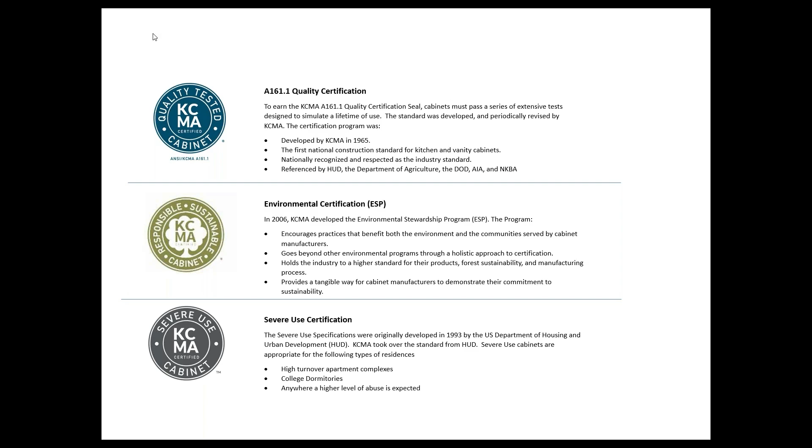One thing that I would like to mention before we get started with the presentation is the 3 standards do get updated and revised periodically by KCMA. The A161.1 standard, the latest version was published in 2022. During the revision from the 2017 to the 2022 standard, we did some clarification on some of the test methods, and we also added a test method in there for testing of wall-hung vanity cabinets.

The ESP standard, we're looking at publishing the latest version in 2024, and one of the additions that we're going to add to that will be the use of a carbon calculator. Participants in that program will be able to use this carbon calculator to determine their carbon footprint. And if they go through that process, they'll earn some points for certification.

Once we collect some data on the participant's carbon footprint, we'll consider doing a sliding scale for awarding points depending on what their carbon footprint is.

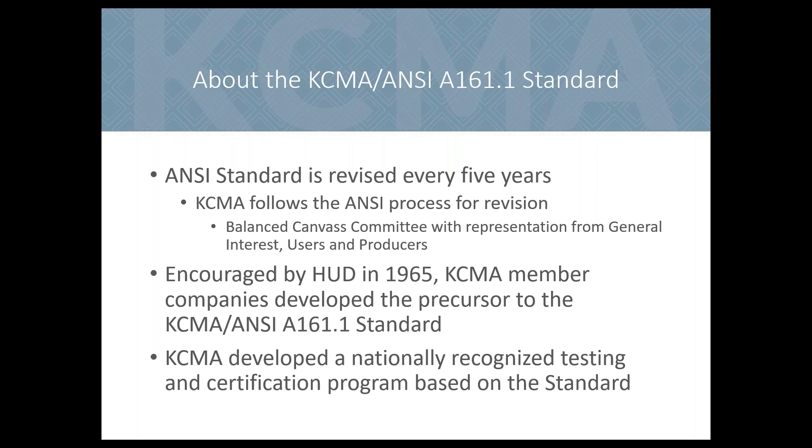HUD has minimum property standards for buildings constructed under HUD housing programs. This includes those single and multifamily homes financed with FHA loans. HUD has specified KCMA A161.1 certification for cabinets.

All North American cabinet manufacturers or cabinet assemblers are welcome to apply for participation in the KCMA A161.1 certification program. The North American presence is required so that cabinets can be randomly picked up for testing from either the manufacturing or assembly plant. KCMA is unable to certify ready-to-assemble or RTA cabinets because the performance of the cabinet during the testing is directly related to how the cabinet is assembled.

Manufacturers decide the cabinet lines to be included in the certification. They may certify one, several, or all of their cabinet lines. Most participants elect to have all of their lines included in the listing. Certified lines are listed on the KCMA website, www.kcma.org, and the listing certificates for each participant can be downloaded from the site.

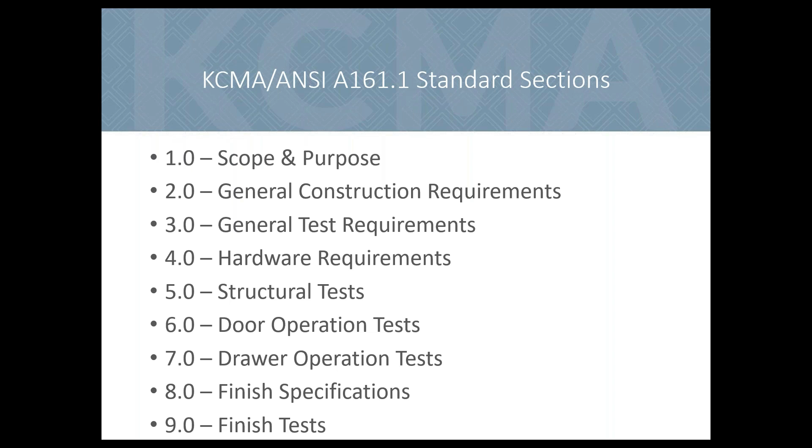Listed are the sections contained within the KCMA A161.1 standard. We will go over each of these in detail later in the course. As you can see, the standard covers everything from general construction requirements to testing of the cabinet finish.

There are very few construction requirements contained within a performance standard. The intent is not to limit materials or designs, provided the materials and design pass the performance test. This is different from other specifications that focus on grades of products based on the materials used in construction and the construction techniques. We will briefly go over the construction requirements that are contained within the A161.1 standard.

One requirement is that all wall cabinets need to be fully enclosed. All cabinets designed to rest on the floor must be provided with a toe space at least 2 inches deep and 3 inches high. When we get to the severe use cabinets, this requirement changes to 3 inches by 3 inches. All base cabinets must have backs, bottoms, and sides. We will see in the next few slides there are some exceptions for specialty cabinets.

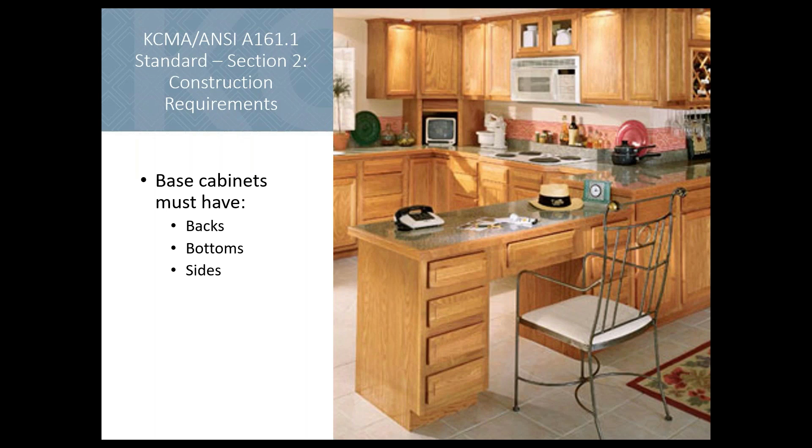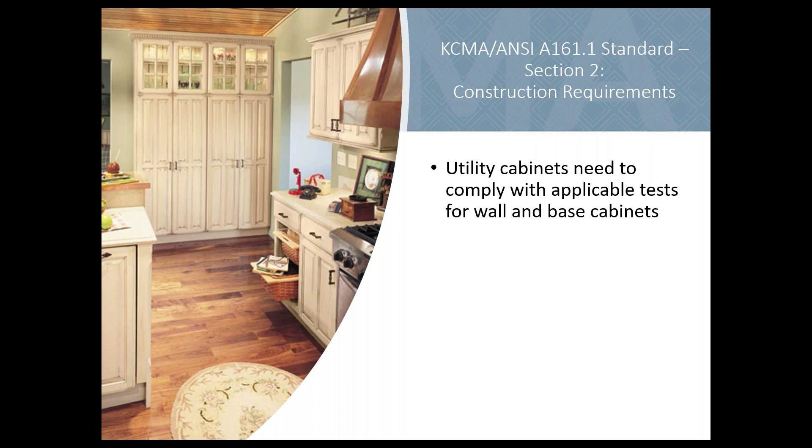All utility cabinets must meet the same requirements as base and wall cabinets. Exceptions are made for cabinets that need to have plumbing or wiring entering the cabinet. Utility cabinets without backs or with cutouts in the backs are permitted. Refrigerator, kitchen sink, and oven cabinets are allowed to have open backs or cutouts as well. This is for plumbing and wiring.

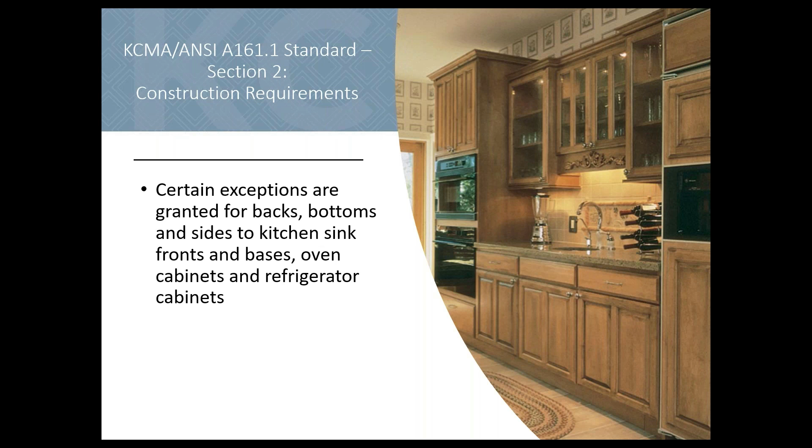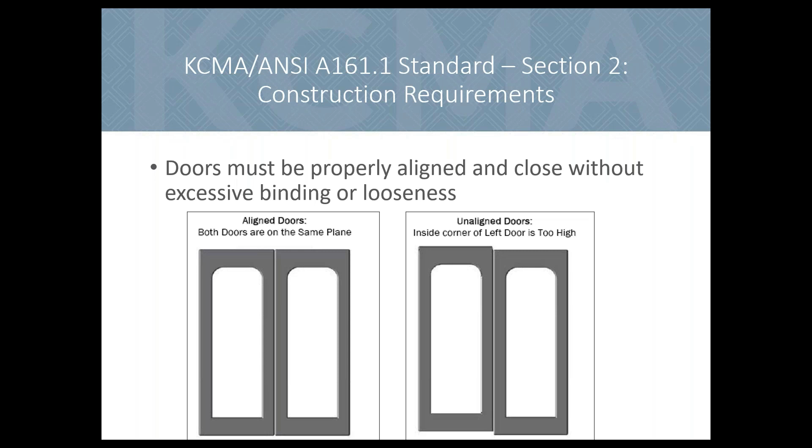Cabinet doors must be aligned and close without excessive binding or looseness. The laboratories performing testing in support of KCMA A161.1 certification are instructed to perform reasonable adjustment on the doors that are typical of an experienced installer. Whether the frames are individual or ganged, they must provide solid construction. The rigid construction requirement is determined through the compliance with the structural testing requirements contained within the standard.

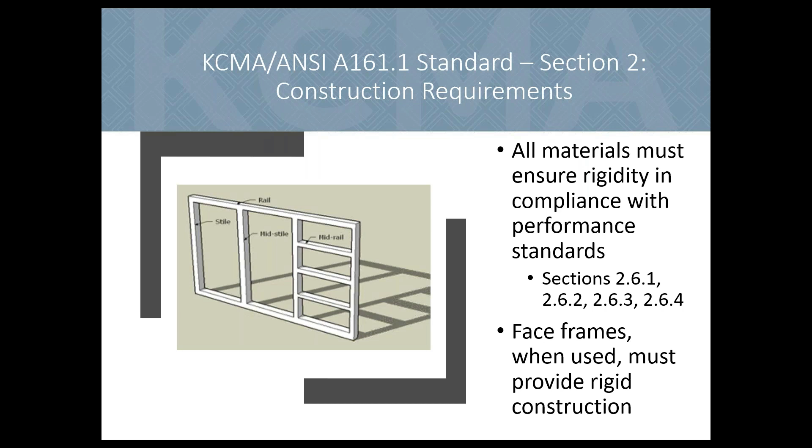A face frame is a solid wood frame placed over the opening, which provides a square and solid foundation for cabinet hardware such as slides and hinges. Thicknesses are usually 5/8 of an inch or 3/4 of an inch material in order to maintain quality construction. With frameless construction, the hardware is mounted to the inside of the casework. Developed in Europe following World War II, frameless has become the standard in commercial case goods and has become more popular in residential casework.

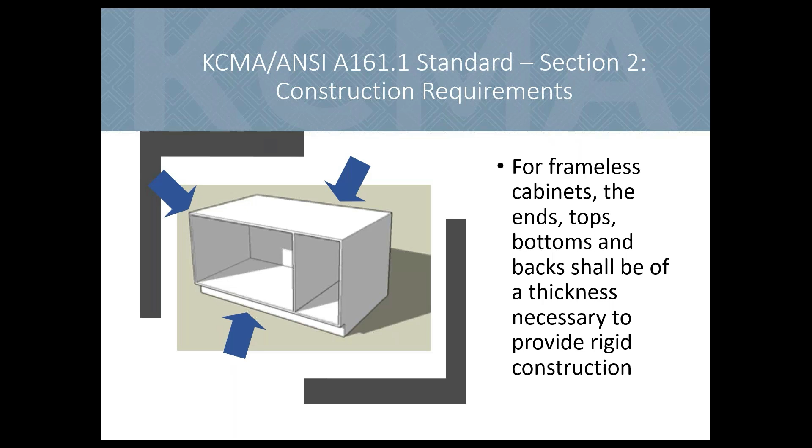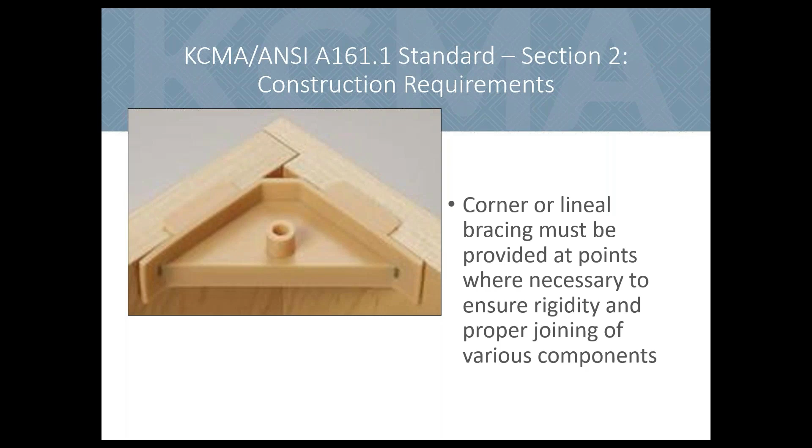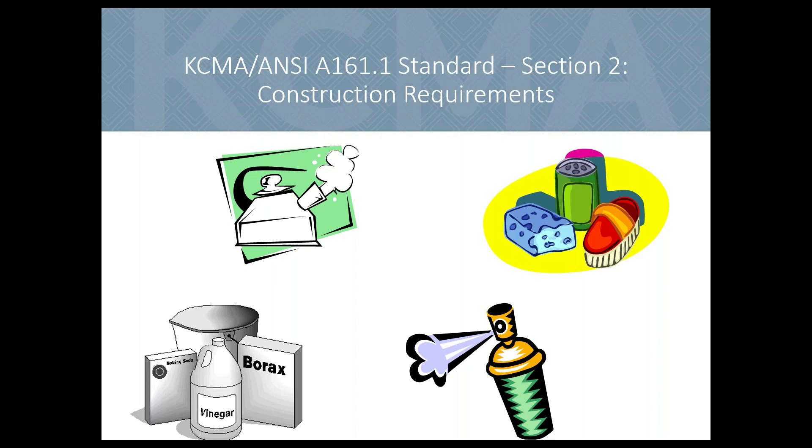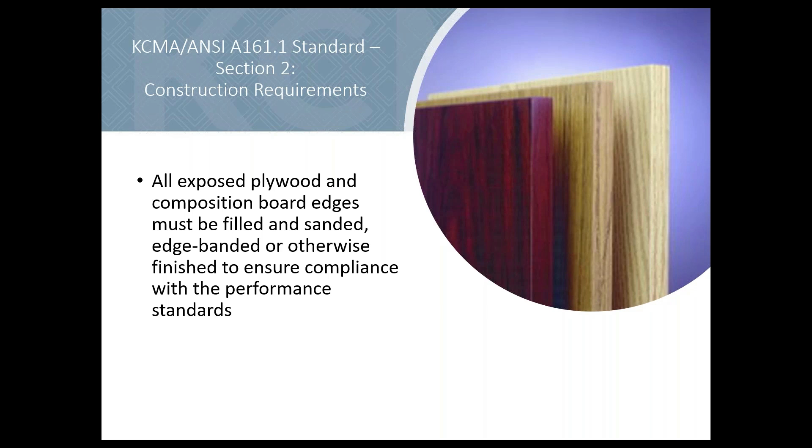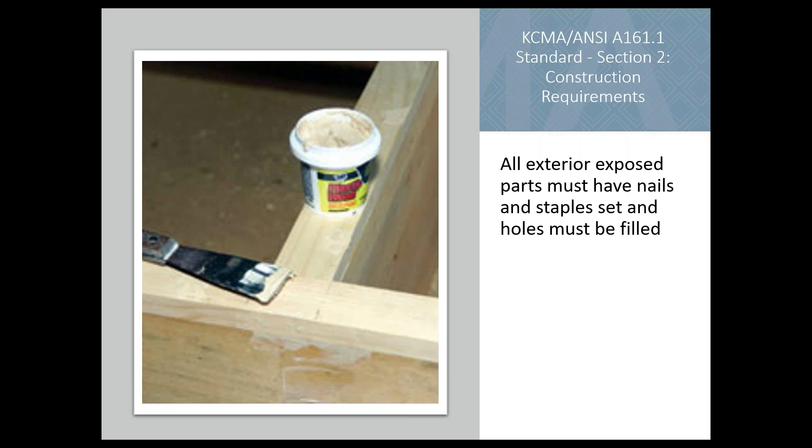All materials used in cabinets must be suitable for use in the kitchen and bath environment, where they may be exposed to grease, solvents, water, detergent, steam, and other substances usually found in these rooms. The performance tests determine if a material is suitable for use in the construction of the cabinet. The unfinished surfaces of the cabinets must be properly prepared before the application of the finish. This includes prepping of edges by either filling and sanding or using edge banding. In addition to finishing the edges, all nails and staples must be set and the holes filled and sanded to a smooth finish.

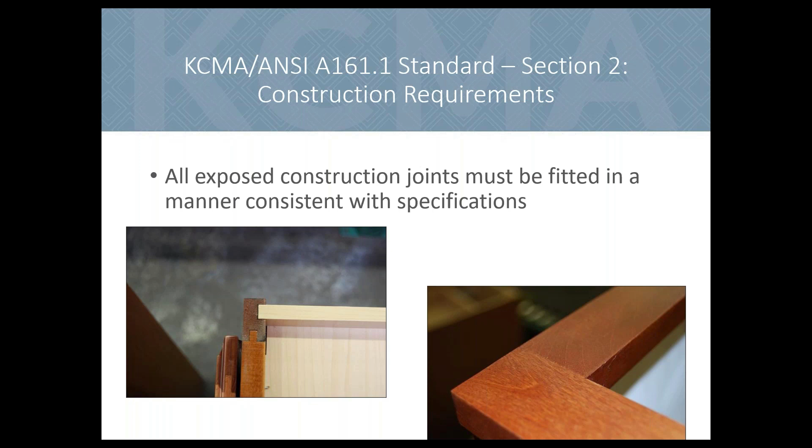There are tolerances included in the A161.1 standard for the allowable gap in exposed joints. Those joints easily seen by the end user require a tighter tolerance than those not easily seen. For example, joints on the face frame of the cabinet require a tighter tolerance compared to joints inside the cabinet. The BHMA maintains a standard for different finishes on different base metals. The manufacturer is required to provide proof of compliance for all hardware used in making the cabinets from the hardware supplier.

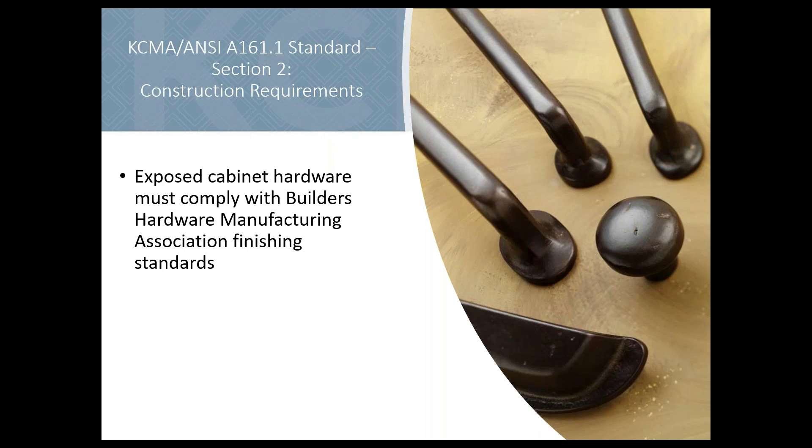There are 5 structural tests in the KCMA A161.1 standard. These test the structural abuse a typical user will subject the cabinets to. We'll go over each of these in detail.

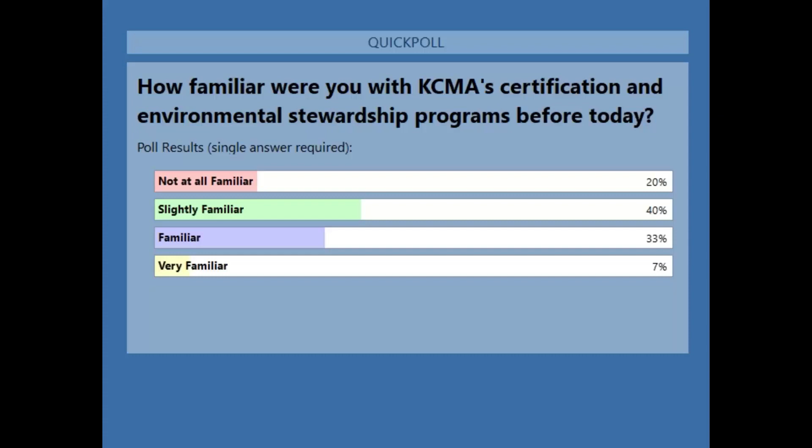Section 5.1 requires all shelves and bottoms are loaded at 15 pounds per square foot, and loading is maintained for 7 days to ensure that there is no excessive deflection and no visible sign of joint separation or failure of any part of the cabinet or the mounting system. This is a long-term load test to make sure the shelves will not experience excessive deflection under load.

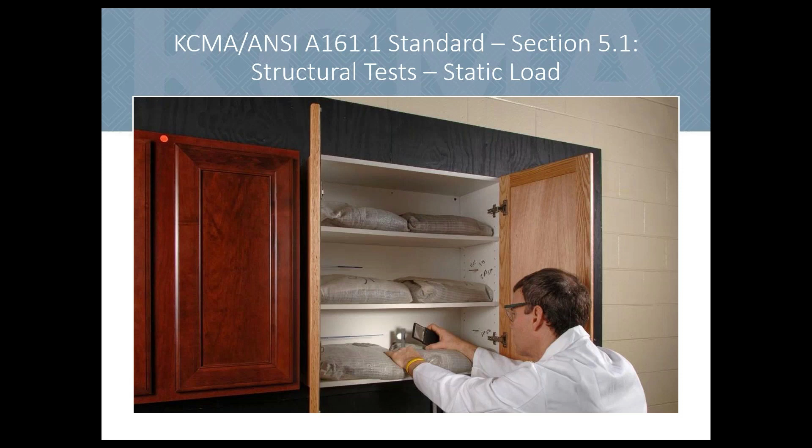Section 5.2 of the standard, mounted wall cabinets are gradually loaded to 500 pounds without any visible sign of failure in the cabinet or mounting system. Cabinets can be loaded with quite a few dishes or canned goods. This test method determines if the cabinet can withstand excessive loading.

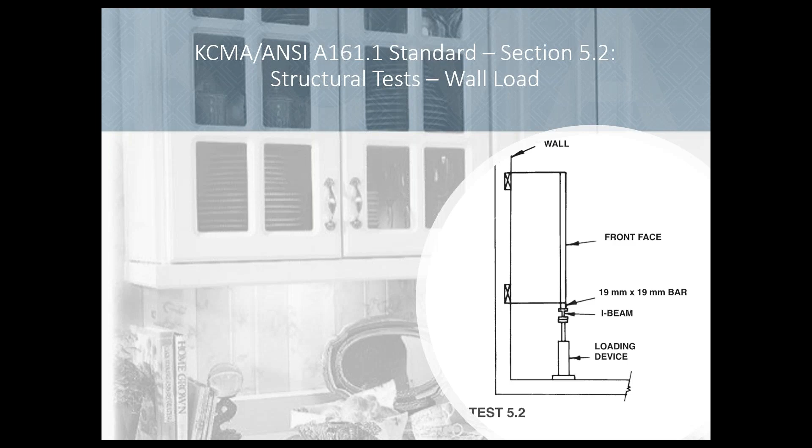Section 5.3 tests the strength of base front joints. A load of 250 pounds is applied against the inside of cabinet front stiles for cabinets with drawer rails, or 200 pounds is applied for cabinets without drawer rails. During installation, when cabinets are screwed together, the front joints can be put under quite a bit of stress. This test determines if the joints can withstand the stresses.

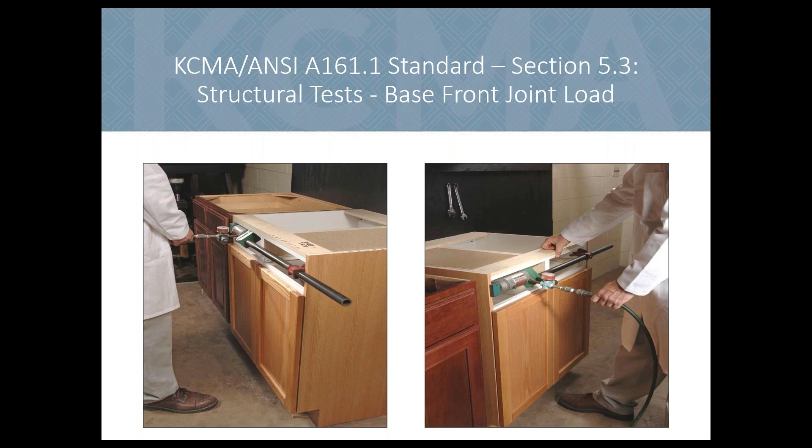Section 5.4 tests the ability of shelves, bottoms, and drawer bottoms to withstand the dropping of cans and other items. A 3-pound steel ball is dropped from 6 inches above the surface. After the test, the drawer must not be damaged and must operate as before the test with no visible sign of joint separation or failure of any part of the cabinet or mounting system.

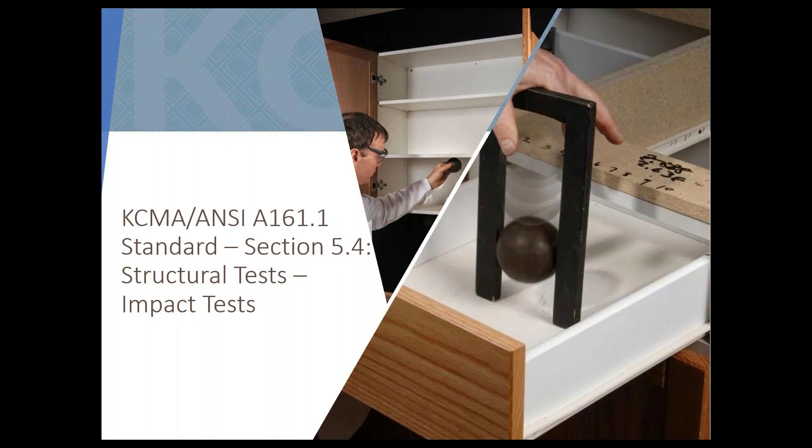Section 5.5 tests the ability of cabinet doors and connections to withstand impacts. A 10-pound sandbag is used to strike the center of a closed cabinet door and repeated with the door opened to a 45-degree angle. The door must operate as before the test and show no damage or sign of separation or failure in the system. This simulates the impacts a base cabinet door might encounter.

Section 6 of the standard focuses on the structural integrity of the door and how it is mounted to the cabinet. There are two test methods performed for door operation. One is a long-term cycling test, and the other a load test.

To test the ability of doors, door holding devices, hinges, and attachment devices to operate under the stress of normal use, doors are opened and closed through a full 90-degree to 20-degree swing for 25,000 cycles. At the test's conclusion, the door must be operable, the door holding device must hold the door in closed position, hinges must show no signs of damage, connections between the cabinet and hinge and door and hinge must show no sign of looseness, and other specifications must be met.

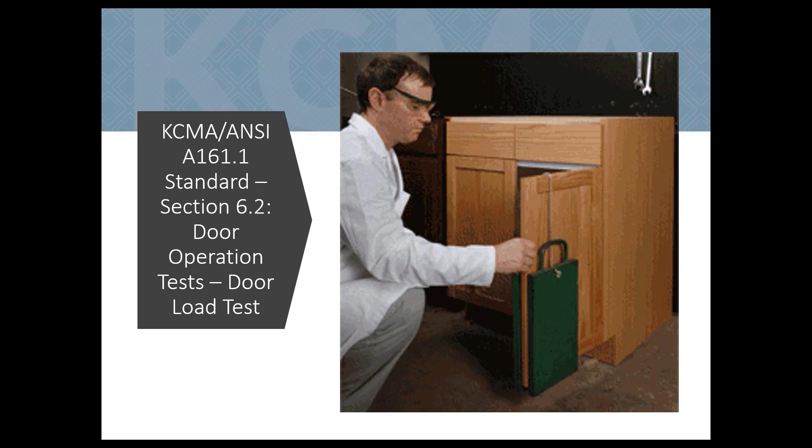Section 7 is very similar to Section 6, but it focuses on the drawer operation and the impact the drawer front will experience when it is closed. Section 7.1 tests the ability of drawers and drawer mechanisms to operate with loading during normal use. Drawers are loaded at 15 pounds per square foot and operated through 25,000 cycles. The drawers must then remain operable with no failure in any part of the drawer assembly or operating system, and the drawer bottoms must not be deflected to a point where they interfere with drawer operation.

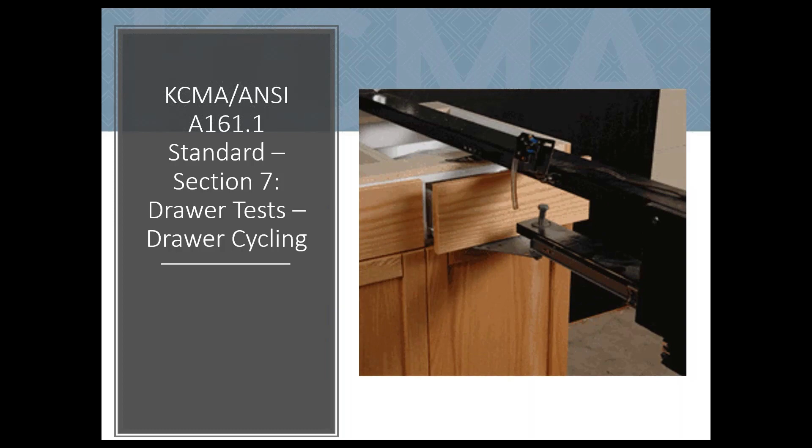Section 7.2 tests the drawer front assembly. It must withstand the impact of closing the drawer under normal use. The drawer front is typically attached to the drawer box with screws, and the drawer front is used to stop the drawer against the cabinet frame when closed. If the drawer is heavily weighted, quite a bit of stress can be placed on the attachment of the drawer front to the drawer box if closed forcibly.

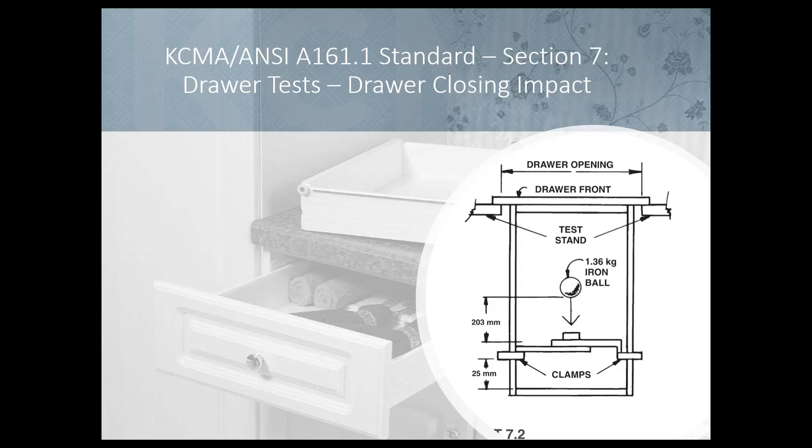Chapter 8 details the requirements for the cabinet finish. The appearance of the cabinet must be acceptable to the average consumer. All exposed surfaces must be free of saw marks, be fully finished without imperfections, and all nails and staples set, filled, and finished. The laboratories performing the testing use a standard observation procedure when inspecting the cabinet's finish.

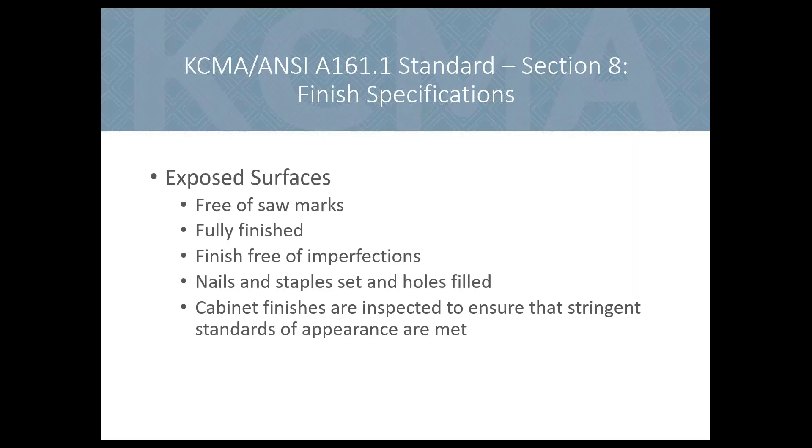Chapter 9 tests the finish applied to the cabinet and makes sure the finish will not fail given what it will be exposed to during the lifetime of the cabinet. There are 6 separate finish tests.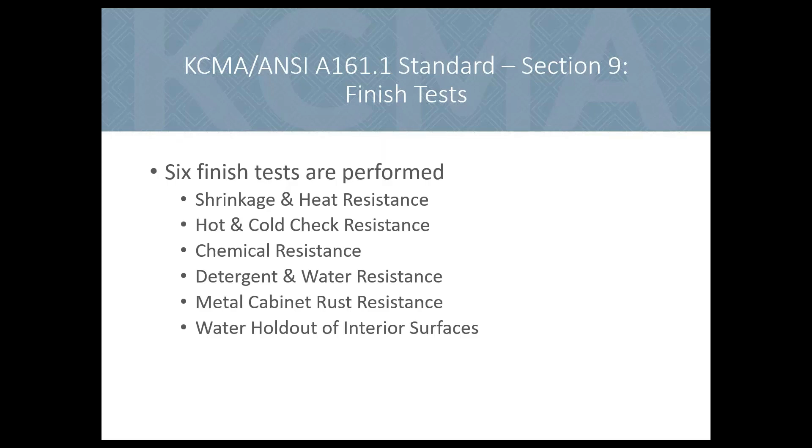Section 9.2 tests the ability of the finish to withstand hot and humid conditions for prolonged periods of time. A cabinet door is placed in a hot box at 120 degrees Fahrenheit and 70% relative humidity for 24 hours. It is then removed and allowed to return to room temperature and humidity conditions. The finish must then show no appreciable discoloration and no evidence of blistering, cold checking, or other film failure. This simulates the extreme conditions cabinets may be subjected to during shipping in the South from the manufacturing plant to the job site.

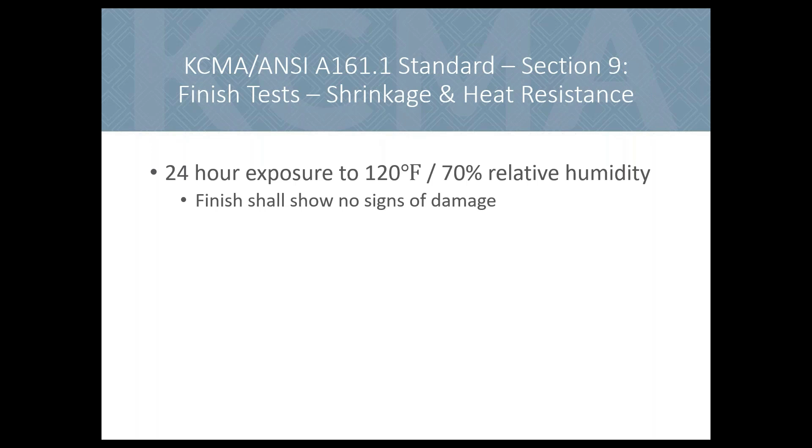Section 9.3 tests the ability of the finish to withstand hot and cold cycles for prolonged periods. A cabinet door is placed in a hot box at 120 degrees Fahrenheit and 70% relative humidity for 1 hour, removed and allowed to return to room temperature and humidity conditions, and then placed in a cold box for 1 hour at -5 degrees Fahrenheit. The cycle is repeated 5 times. The finish must then show no appreciable discoloration and no evidence of blistering, cold checking, or other film failure. This test simulates what a cabinet might be subjected to when shipping from one extreme condition to another between the manufacturing plant and the job site.

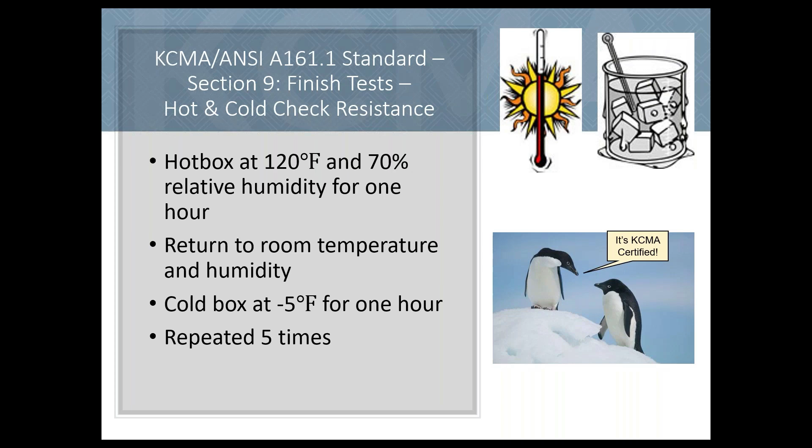Section 9.4 tests the ability of the finish to withstand stains and chemicals typically found in the kitchen and bathroom. Exterior exposed surfaces of doors, front frames, drawer fronts, and end panels are subjected to vinegar, lemon, orange, and grape juice, tomato ketchup, coffee, olive oil, and 100 proof alcohol for 24 hours. Mustard is applied for 1 hour. After this test, the finish must show no appreciable discoloration, stain, or whitening that will not disperse with ordinary polishing, and no indication of blistering, checks, or other film failure.

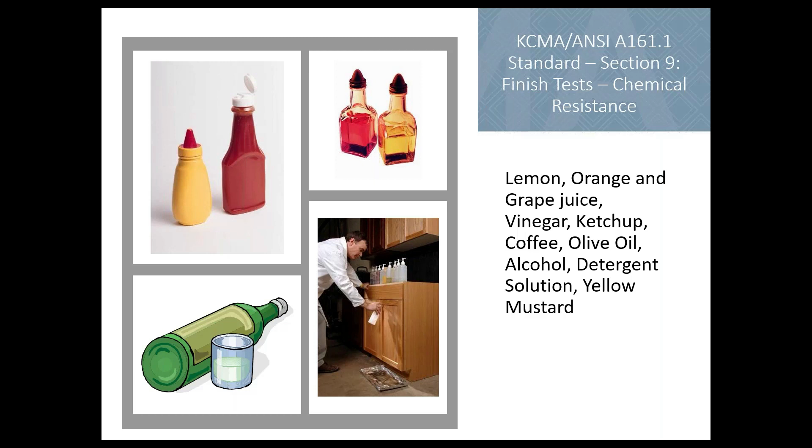Section 9.5 tests the door's resistance to exposure to moisture. The door must resist 24 hours of exposure to a detergent and water solution. This simulates hanging a wet dish towel on the door to dry. The door edge must then show no delamination or swelling and no appreciable discoloration or evidence of blistering, checking, whitening, or other film failure.

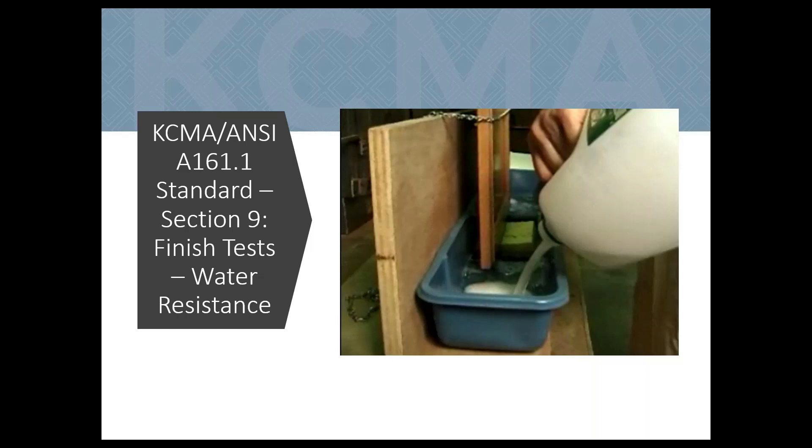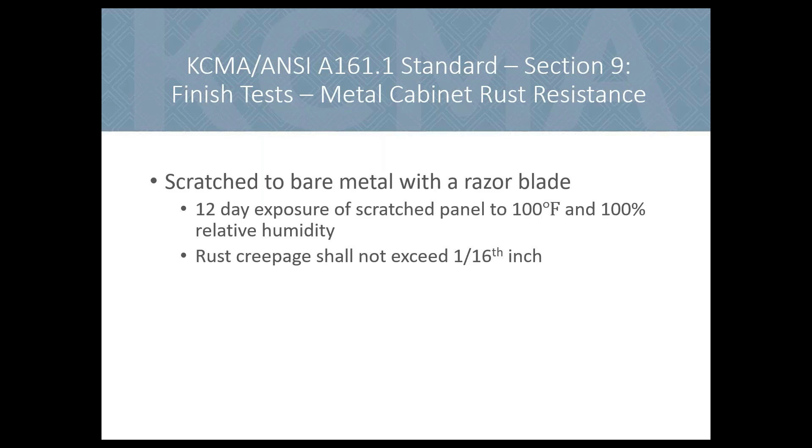Section 9.6 is for metal cabinets. If the surface of a metal cabinet gets scratched, only minimal rusting is permitted. The cabinet is scratched with a razor blade and then exposed to 100 degrees Fahrenheit, near 100% relative humidity for 12 days. Section 9.7 tests the shelf's ability to resist damage from cups and plates going directly from the dishwasher to a shelf. A ceramic coffee cup is dipped in boiling water and then placed on the shelf for 24 hours. At the end of the 24-hour time period, there shall be no damage to the shelf.

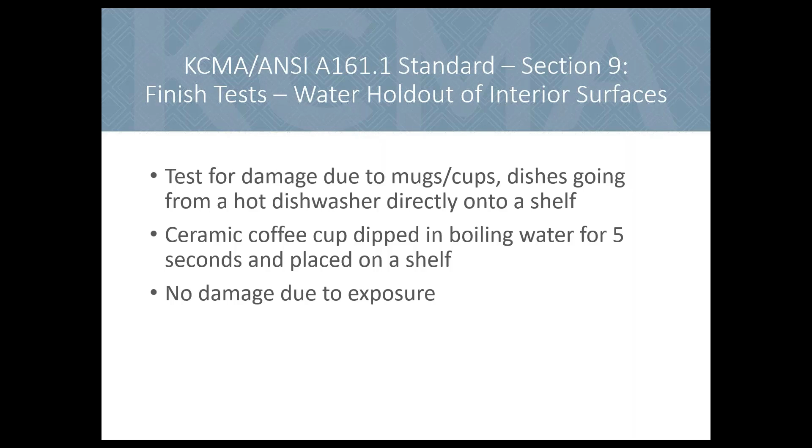Certification is initiated with random selection of cabinets for complete KCMA A161.1 testing. Testing is typically performed on a 30-inch base cabinet and a 30-inch by 30-inch wall cabinet. Based on the extent of the cabinet lines to be certified, there will be additional testing done to make sure all the various materials and construction techniques comply with the standard. 6 months after the initial testing, another round of testing is performed. If all goes well with the 6-month test, the certification participant goes to annual testing.

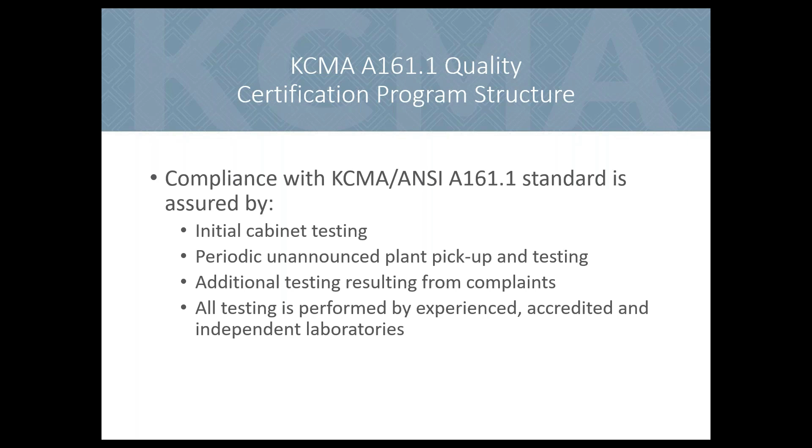Companies successfully passing the testing receive certification. They are added to the online listing directory at www.kcma.org and can now use the KCMA A161.1 certification seal on their listed cabinets.

Wow, Chuck, I don't know about the ladies and gentlemen in the audience, but I don't know how anyone can buy an uncertified cabinet after all I just watched with the testing.

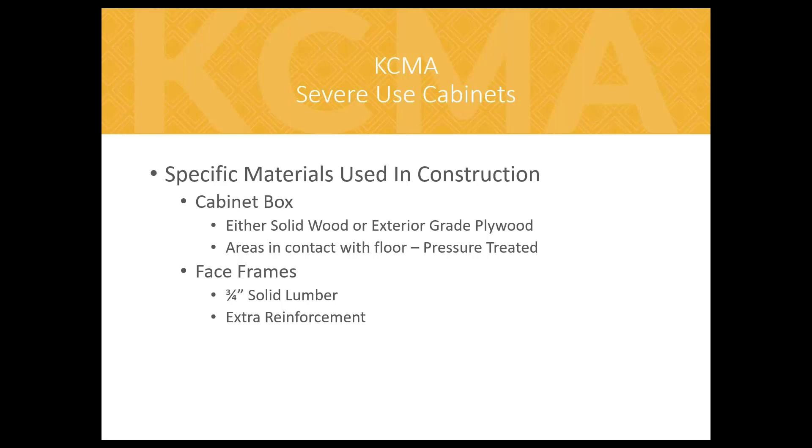Doors on severe use cabinets must be either solid wood or 7-ply A1 plywood. The doors must have a reverse edge to allow opening by hand without the need for door and drawer pulls. The hinges must allow for full opening of the door.

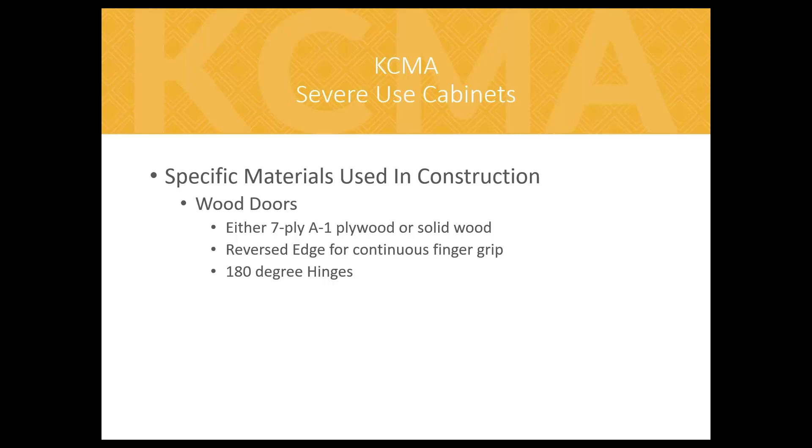Severe use cabinet drawers are required to be assembled using either French dovetail or mortise and tenon construction. The drawer box must be made with a minimum 11/16 inch thick solid lumber, and the drawer face must be of the same construction as the doors.

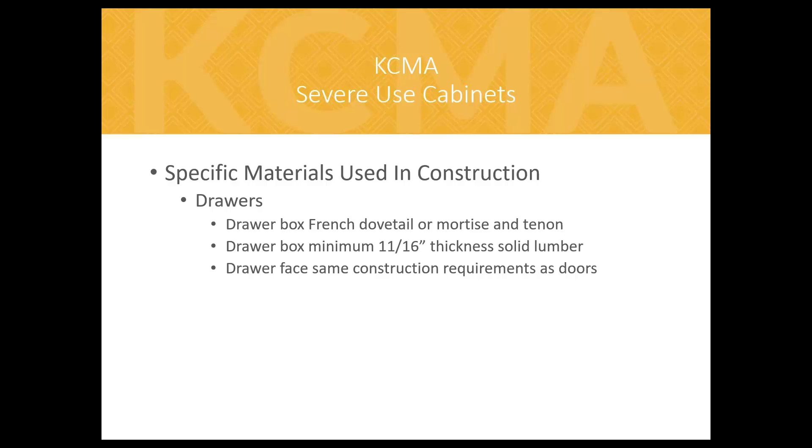The hang rail on severe use cabinets must be a minimum of 3/4 inch by 3.5 inch by full width of the cabinet and constructed of solid lumber. The end panels need to be a minimum 5-ply exterior grade plywood.

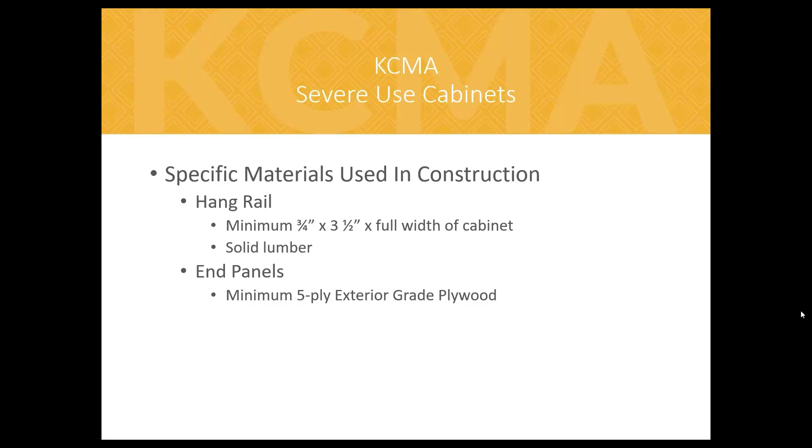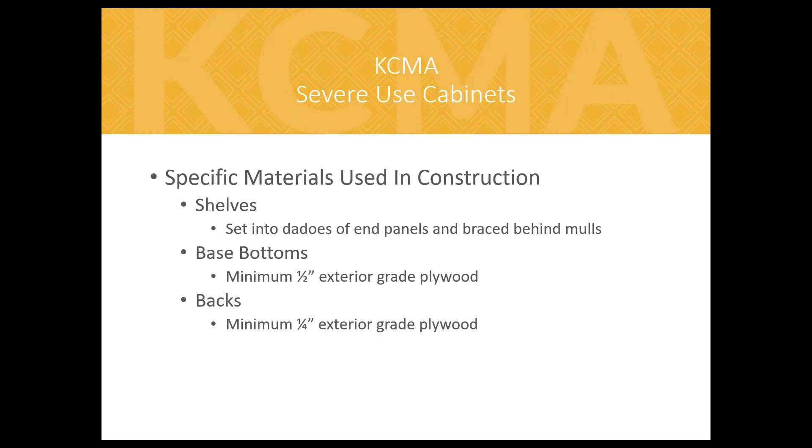Severe use cabinet shelves need to be set into dados cut into the end panels, and the shelves need to be braced behind mulls. The bottom of the base cabinet must be a minimum 1/2 inch thick exterior grade plywood, and the backs on all severe use cabinets need to be a minimum 1/4 inch exterior grade plywood.

Prescriptive-based ESP certification requires participants to earn points in all 5 sections of the ESP specification. The 5 sections are air quality and pollution prevention, resource sustainability, waste minimization, environmental stewardship, and community relations. Next, we will go over each of these sections in detail.

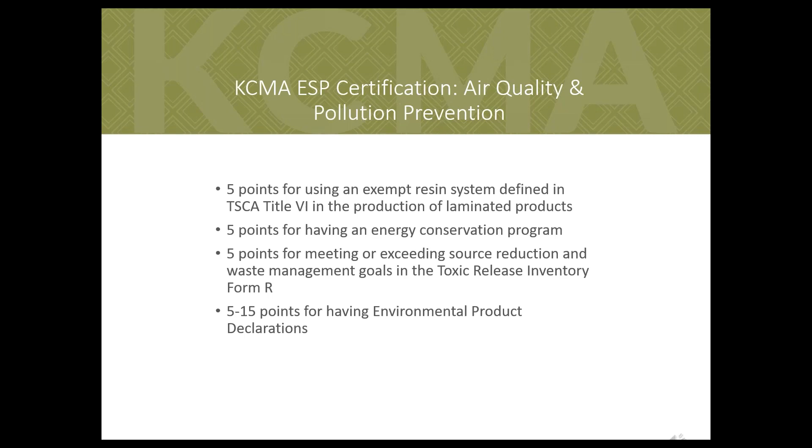5 to 15 points can be earned if the participant has developed environmental product declarations. If they are not certified, 5 points are earned. If they are certified, 15 points are earned.

The second section of the ESP specification is resource sustainability. Participants can earn 10 points towards certification for purchasing particle board and medium density fiberboard, MDF, that is certified to comply with either CPA's ECC 4 standard or Benchmark's CWSS. The ECC 4 and CWSS are standards that require the materials used in the production of the particle board and MDF be environmentally sustainable. This includes having a small carbon footprint, being locally sourced from recycled recovered materials, and sourced through a recognized forestry certification program for sustainability.

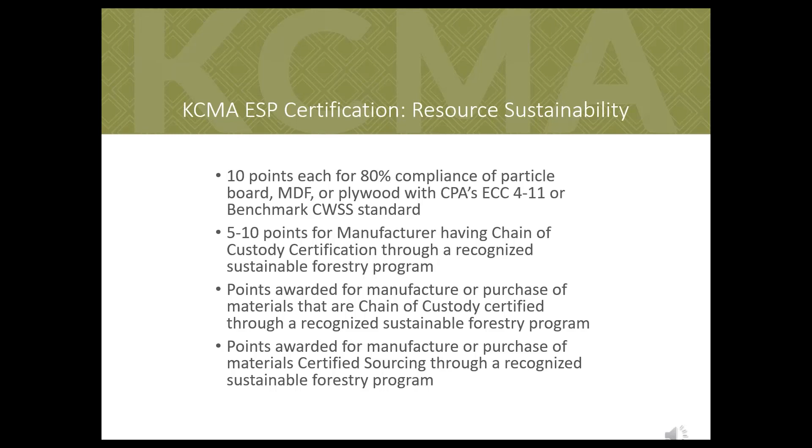Points can also be earned in this section if the manufacturer has chain of custody certification or if the manufacturer purchases materials that have chain of custody certification. If the manufacturer purchases materials that are certified sourcing through a recognized sustainable forestry program, points can also be earned.

Several ESP recognized chain of custody certification programs include the Sustainable Forestry Initiative, SFI, the Forest Stewardship Council, FSC, or the American Tree Farm System, the ATFS. Participants can also earn 5 points in the Resource Sustainability section for having annual training of suppliers on their preferences for purchasing certified hardwood lumber. The training needs to be written and documented.

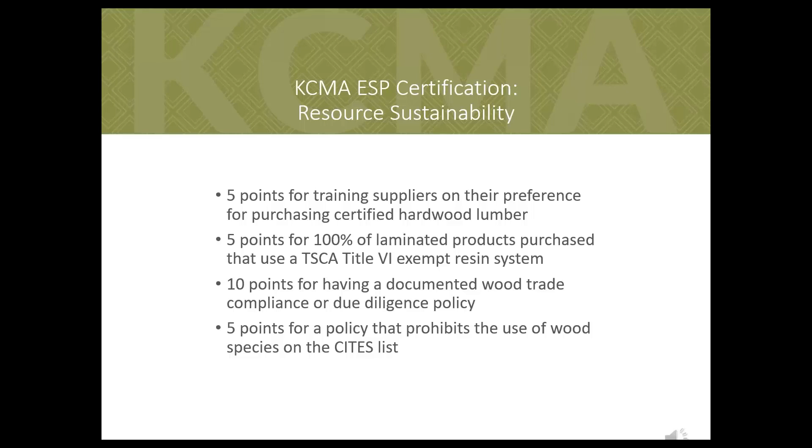5 points can be earned if 100% of the laminated products purchased by the participant use a TSCA Title VI exempt resin system. If the participant has a documented wood trade compliance or due diligence policy, points can be earned. They can also be earned if they have a policy that prohibits the use of wood species on the CITES list.

The third section of the ESP specification is waste minimization. This section deals with what happens inside the manufacturing plant. Points can be earned towards certification if the participant has a comprehensive recycling program. At least 3 of the following must be recycled to earn points: cardboard, paper, plastic, wood, solvents, and metal. Participants are required to provide pickup tags indicating the type and amount of materials recycled for points to be earned.

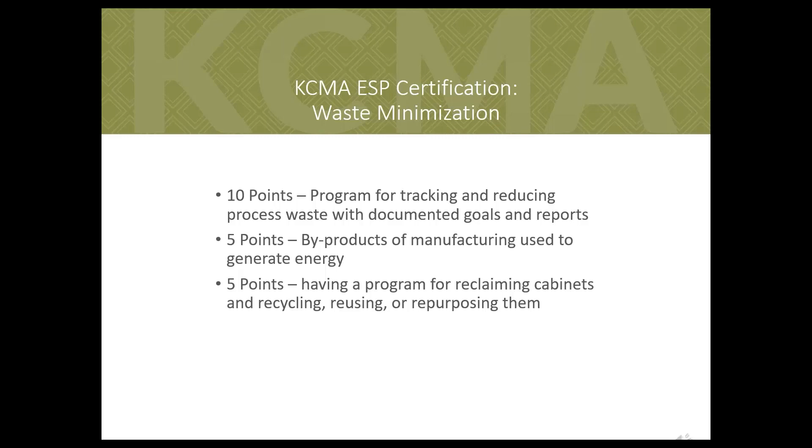Points can also be earned in waste minimization for tracking and reducing process waste. There need to be documented goals and reports submitted in support of the claimed points. If byproducts of production are used to generate energy, points can be earned. Many manufacturing plants either burn their sawdust and scrap to generate steam or electricity, or ship that material to an external facility that does. If there is a program in place for reclaiming cabinets removed during a remodel and either recycling, reusing, or repurposing them, points can be earned.

The fourth section of the ESP is environmental stewardship. Points can be earned towards certification for having either a certified or non-certified environmental management system in place. An environmental management system is a comprehensive program that demonstrates the company has reduced its environmental impact and increased its operating efficiency. A typical certification for an environmental management system is ISO 14001. Points can also be earned in the fourth section of the ESP, environmental stewardship, if the participant reviews the environmental practices and policies of their key vendors and contractors.

If the participant promotes the use of renewable and/or recycled materials or products in the manufacturing plant, points can be earned towards certification. Participation in EPA's SmartWay Transport Partnership as a registered partner can earn points. Shipping products with a registered SmartWay partner is more efficient and has less of an environmental impact compared to using a non-registered shipping company.

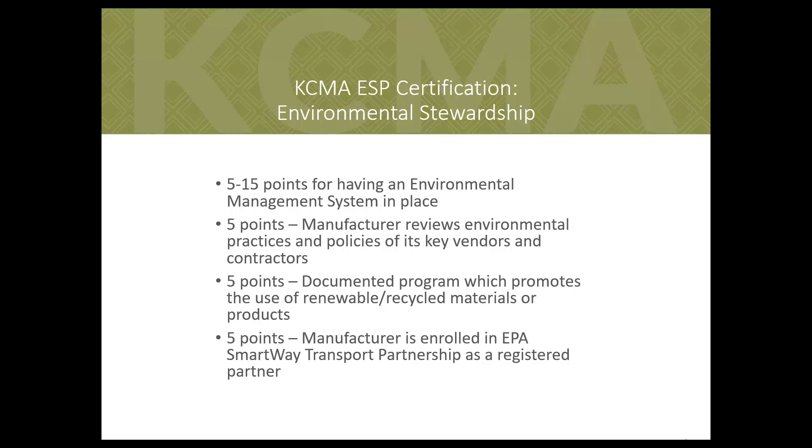Points can also be earned in the environmental stewardship section if there is a documented corporate social responsibility or environmental social governance report. If the participant has an environmental sustainability strategic plan, they can earn 5 points towards certification. In addition, 5 to 15 points can be earned if there are health product declarations for the cabinetry.

The fifth and final section of the ESP specification is community relations. If the participant either volunteers time or money to charitable organizations in the community, points can be earned towards certification. This promotes a sense of community and commitment to those in the vicinity of the manufacturing plant. Points can also be earned towards certification if the participant has not had a major non-compliance citation from any federal, state, or local environmental regulatory agency in the previous 12 months.

In addition, if the participant highlights their environmental initiatives on their website and uses the ESP logo on their website, 5 points can be earned. This concludes the presentation portion of the AIA approved course on KCMA's 3 certification programs for kitchen and bathroom cabinets.

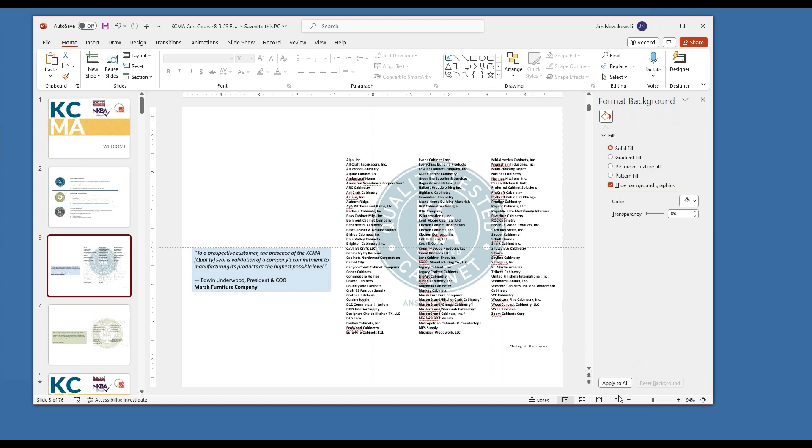No, that's okay. What we want to do is put this slide up that Chuck was talking about before. And Chuck, if you could address that, let me just share this with the people, and off we go to the races. There you go. This is the one that they want to talk about, right? These are the people who have passed certification. Is that correct? Correct. Yep.

So if you go to kcma.org, you'll find a bar at the top of the page, and there's an area for certifications. If you hover over the word certification, you will get a drop-down list, and from that you can search for all those that are currently certified. You can filter in various ways to find a cabinet company in your region. You can filter for just quality certification or just ESP or severe use or all three. It's a very powerful tool that we've built into our website, and I encourage you to use it in finding certified cabinetry.